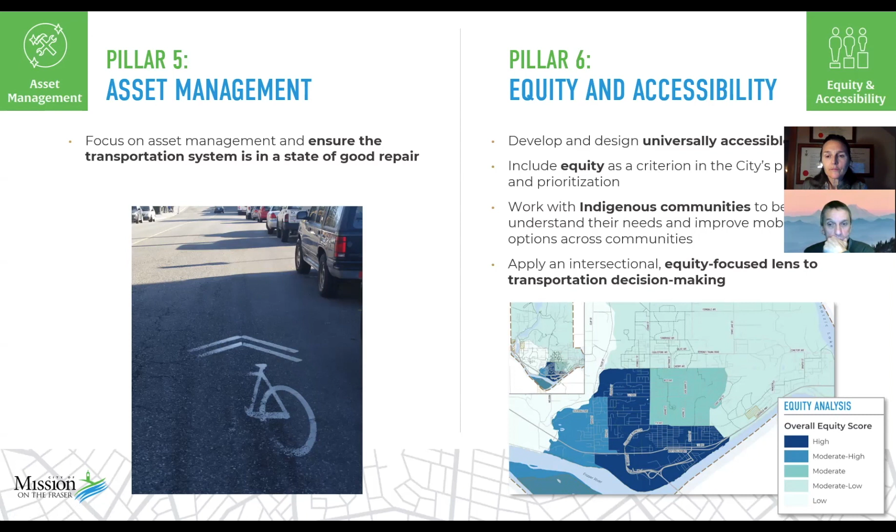So those are all the foundational elements, and we have some strategies for each of those. Then we move into the final chapter, which is really looking at more specific strategies and actions for each mode of transportation. This is really where the bulk of the concrete actions and recommendations in the transportation plan will be highlighted.

So the first theme is looking at active transportation. By active transportation we're talking about walking, rolling, which could include skateboarding and rollerblading, e-scooters, as well as cycling. So we're looking at walking, rolling, and cycling within this umbrella of active transportation.

A number of the strategies to enhance active transportation would be, firstly, to develop a complete, connected, and accessible pedestrian network. This is looking at sidewalk coverage throughout the city and improved trails throughout the city. I'll show a map of that on the next slide with a proposed sidewalk and trails network.

We also have a proposed cycling network that would provide citywide cycling facilities that would be comfortable and safe for people of all ages and abilities.

Thirdly, looking at enhancing trails and greenways to provide recreational opportunities. This is an important theme, recognizing the city has an extensive, well-established trail network. Primarily a lot of those trails are likely used for recreation, but there's, especially as we've seen during COVID, a strong relationship between recreation and transportation, really trying to tie together the parks and recreation and open space opportunities with transportation.

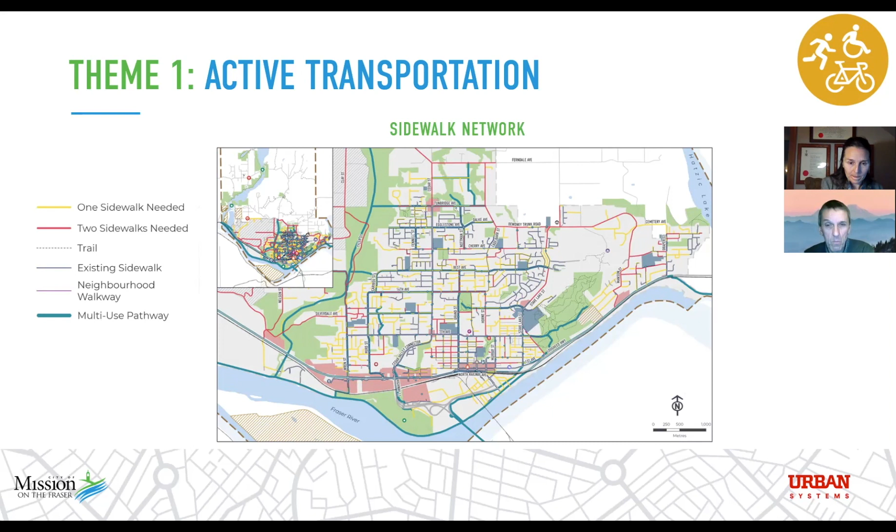This shows quite a lot of gaps in the city sidewalk network that would need to be filled in over the long term. As part of the final phase of this process, we'll be developing a prioritized list of short, medium, and long-term sidewalks. This would be the long-term sidewalk network, essentially creating a complete build-out with at least one sidewalk on all city streets.

Much of what's currently in place in Mission and many other cities in Metro Vancouver and elsewhere are painted shoulders that can be used by cyclists, or just a painted bicycle lane. But research and evidence across North America shows those aren't very effective at getting a broad spectrum of people to feel safe and comfortable cycling. So what many cities are focusing on instead are these all ages and abilities facilities that address one of the main barriers to cycling: people not feeling comfortable riding next to busy roadways with high traffic volumes and speeds. There are three different options.

One is local street bikeways, on quiet residential streets where traffic volumes and speeds are fairly low, so it's comfortable for cyclists to share the road with vehicles. On busier streets, we look at protected bicycle lanes, which have physical protection, not just a painted line, to separate vehicles and cyclists. The third facility type is off-street pathways.

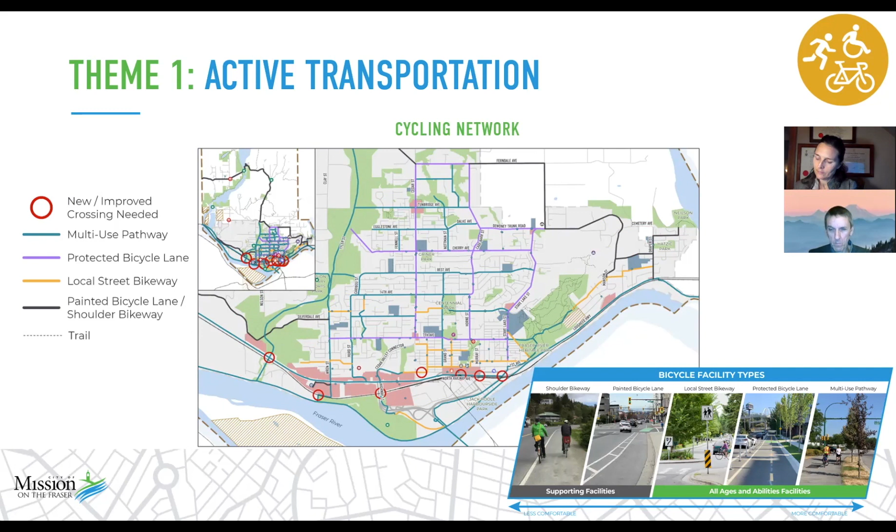The third piece we'd be looking at is trails and pathways. We have a trails map identified in the Transportation Master Plan. This is just showing one example of the aspirations in the trails plan: to develop a waterfront multi-use greenway or pathway.

That would be in line with the Experience the Fraser concept plan, if any of you have heard about that, which is a vision to create an active transportation corridor spanning the length of the Fraser River, all the way from the Salish Sea right up through to the Fraser Canyon.

And that would really connect all municipalities and many Indigenous communities along the way. So this really would help support that regional vision to do that.

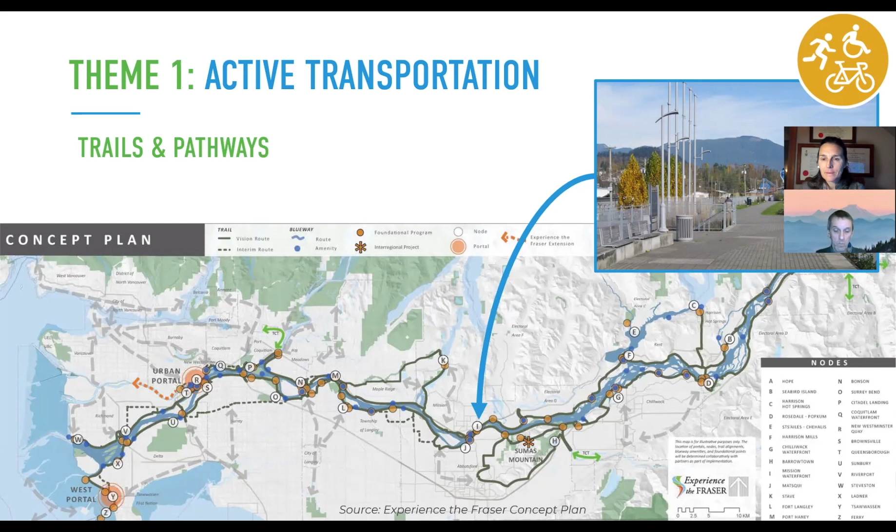Now, the trails and pathways aren't exclusively focused on just this waterfront connection. That's just one example of some of the opportunities for trails and pathways and integrating recreation and transportation opportunities.

The second theme we've identified is focusing on transit, recognizing that transit service is provided by BC Transit, but the city still has a role to play, especially when it comes to infrastructure, things like bus stops. The city works with BC Transit to help coordinate transit planning and fund transit services.

Looking at some opportunities for transit, firstly is ensuring the city works closely with BC Transit to develop an updated transit network and improve transit service. BC Transit next year plans to develop a detailed local area transit plan for the city that would go into more detail than what's included in a more strategic level document like the TMP.

But I'll show on the next slide a framework that could help set the stage in identifying some major desire lines and key connections for transit, working towards a transit system that is simple and direct and easy to use, with frequent transit service on major corridors throughout the city.

Second is looking at ways to improve the transit user experience. This includes ensuring bus stops have benches, shelters, lighting, and amenities like garbage cans, timetables, and route information, so it's comfortable and customers have the information they need when waiting for the bus.

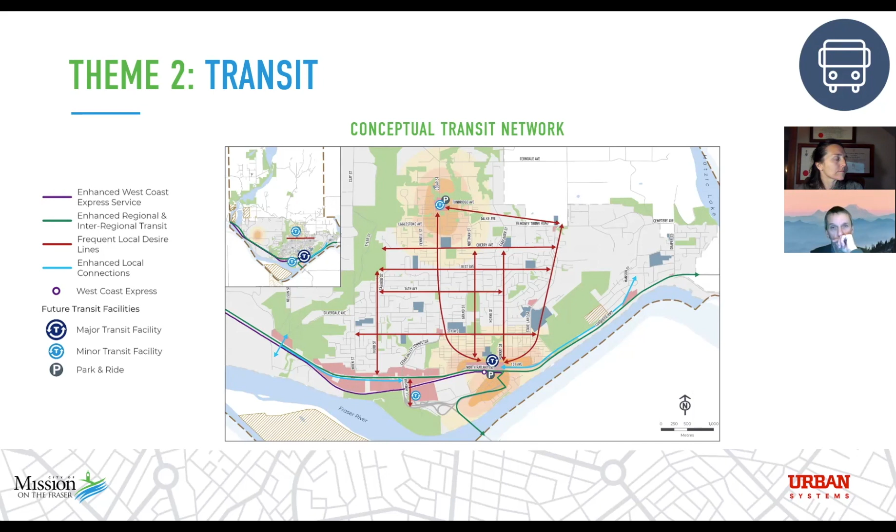I mentioned as well the potential for a second West Coast Express station. This would likely be over the long term as growth and development occurs in the Silverdale area, with a West Coast Express station near Donatelli Avenue and Lougheed Highway, providing high quality transit options as that area of the city builds out.

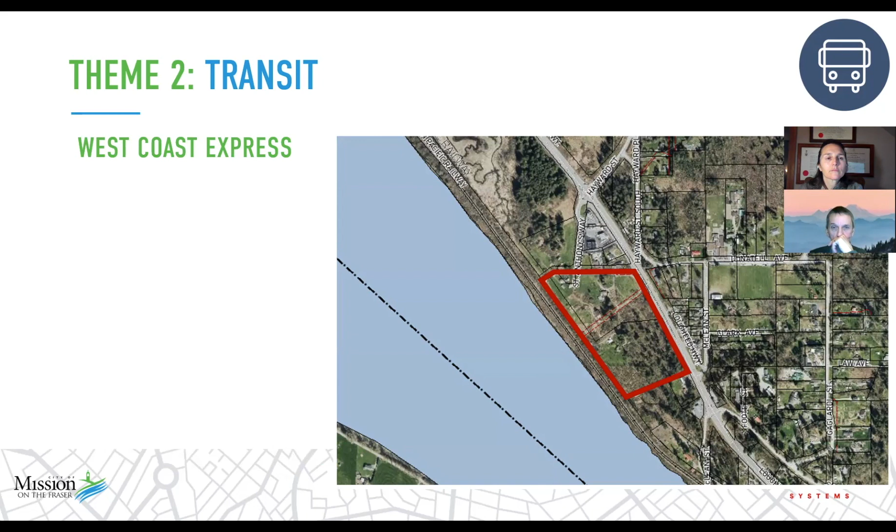The third theme is looking at goods movement, recognizing this plan is looking at not just people, but the needs of commerce and ensuring a thriving, vibrant city.

This includes updating the designated goods movement network, which covers truck routes and railways, continuing to work with the Ministry of Transportation and Infrastructure and the BC Trucking Association to explore the potential for a downtown truck bypass, and looking at alternatives to the road network, such as rail and marine networks, leveraging the city's position on the Fraser River.

One notable change to the goods movement network is that previously 7th Avenue and Wren Street were identified as part of the designated truck network. We're suggesting removing that for a couple of reasons.

7th Avenue is identified as a greenway, and the city is currently moving forward with planning and design of a greenway or active transportation facility there. It's envisioned to be a busier transit route in the future, and there aren't many commercial or industrial destinations on 7th Avenue requiring it to be a truck route. Truck volumes are actually very low, less than 1% of all vehicles on 7th Avenue.

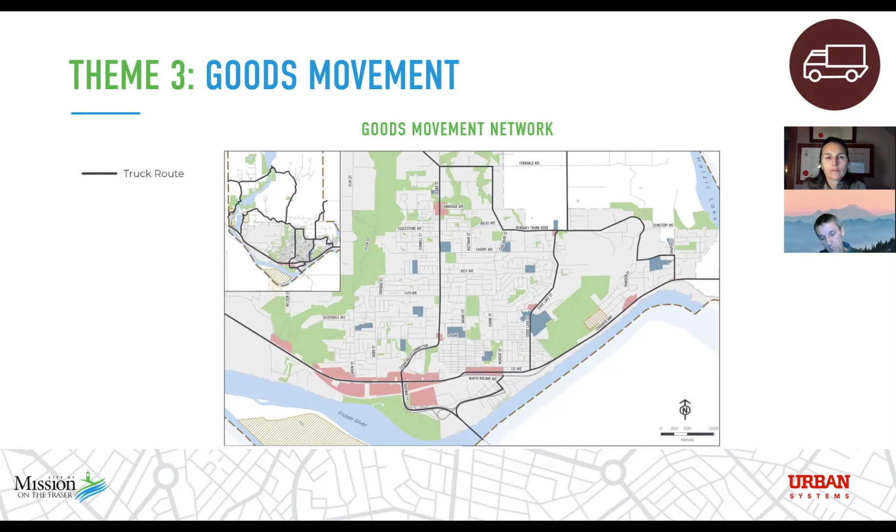The final theme of the plan looks at driving and vehicle movement throughout the city, with a number of strategies for driving.

First is updating the city's street network classification, ensuring it's not just based on vehicle needs but also considers requirements for pedestrian and cycling facilities, thinking about street design from a 'complete streets' lens that focuses on all road users.

Secondly, to develop complete streets improvement strategies for major streets, looking at new roadways throughout the city and improved or widened roads to accommodate travel demands.

Thirdly, looking at safety and operational improvements, many of them intersection improvements identified through collision analysis as high collision locations or areas with congestion issues today, to improve safety and traffic operations.

Fourthly, to work with the ministry and coordinate improvements along the highways running through the city. They're not within the city's jurisdiction, but the city can identify opportunities and encourage the ministry to move forward with those improvements.

Fifthly, from an asset management perspective, maintaining roadways in a good state of repair and thinking about operations and maintenance. And finally, making sure we're really considering the needs of rural areas throughout the city, since that's a huge part of the city's land area, ensuring the plan isn't just focused on the urban core but also on the safety of rural roadways.

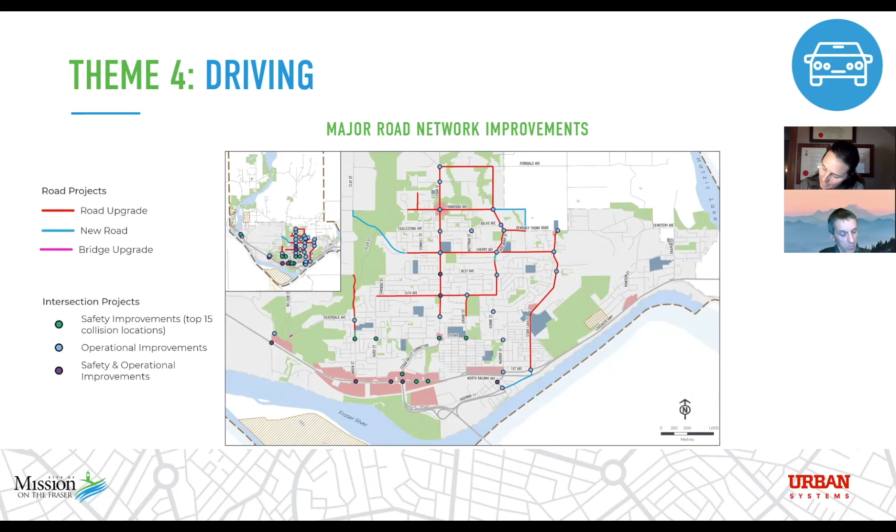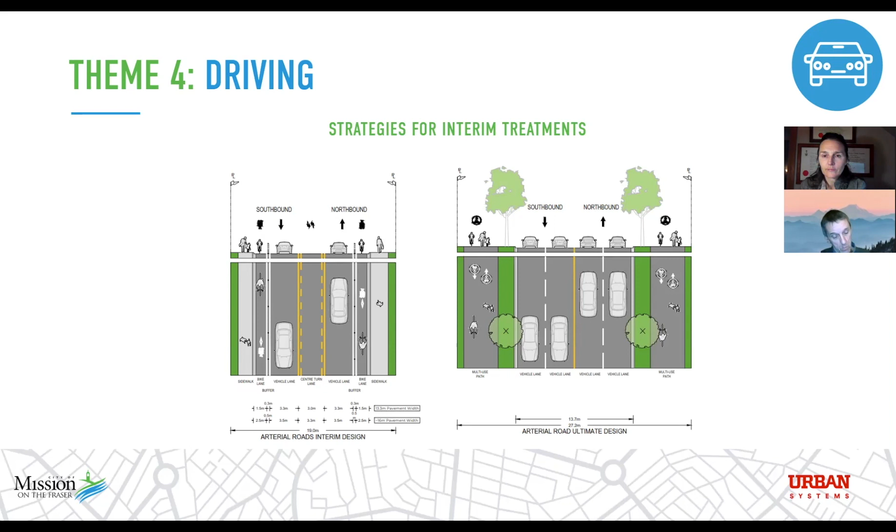Looking at potential strategies for interim treatments as well—what can the city do to improve safety along some streets in the near term, even if we're working towards a long-term cross-section and widening some roadways to 4 lanes. Looking at how we could do interim treatments with different cross-sections to improve safety for vulnerable road users, like you see on the left here. This would be an example of an arterial road, looking at a 3-lane cross-section with protected bicycle lanes until a full 4-lane cross-section is required.

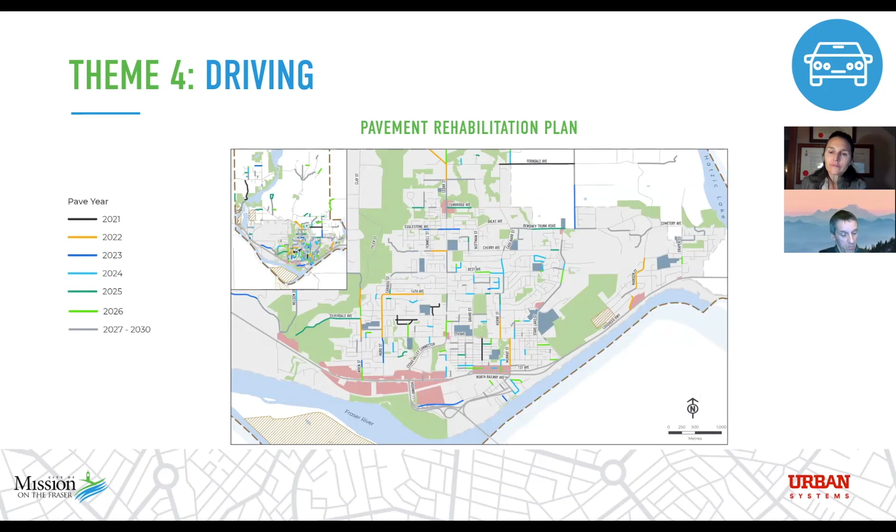We also looked at pavement quality throughout the city. Again, this ties back to asset management and looking at the condition of infrastructure. Based on areas that have need for pavement rehabilitation, we've identified a 10-year plan to improve the quality of pavement throughout the city.

And those are some of the major features in the road network plan. I've been talking for quite a while here—there's lots of key features identified in the transportation master plan and a lot of projects involved. So the final consideration, which we'll be putting together as the final piece of the plan, is what this looks like in terms of the financial implications, both over the long term, and coming up with short, medium, and long-term priorities that work within the city's budgeting and capital planning process to ensure it's an affordable plan as well.

When we look at each of the key features of the plan, I won't go through each in detail, but some preliminary cost estimate ranges we've put together would be in the order of about $220 to about $320 million to build out the entire long-term transportation master plan. Recognizing a lot of this would be development driven and provided through development as that growth and development occurs. Those cost estimates are still preliminary at this point, really to gauge the order of magnitude financial implication of what's in the plan.

As I mentioned, the majority of those costs are growth related and would be provided through development and through what are called development cost charges, or DCCs. The city can build those costs into its DCC bylaw so that they're provided through the development process and not through taxation or general revenues as much as possible.